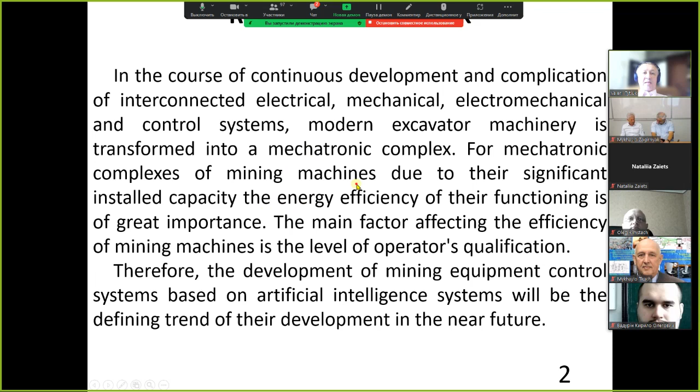For mechatronic complexes of mining machines, due to their significant installed capacity, the energy efficiency of their functioning is of great importance. The main factor affecting the efficiency of mining machines is the level of operators' qualification. Therefore, the development of mining equipment control systems based on artificial intelligence will be the defining trend of their development in the near future.

In the mining industry, the production of new generation equipment is characterized by a functional and constructive combination of electromechanical converters with energy and information components, i.e., the creation of mechatronic complexes.

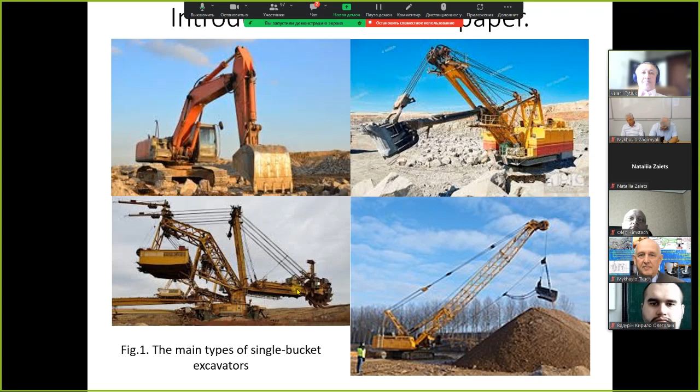Excavators are made with different interchangeable tools, as shown on this slide, and in any case the working body of the excavator has a rigid connection with the machine mechanisms, which limits the degrees of freedom.

The mining enterprises of the post-Soviet space, characterized by high hardness of extracted iron ore raw materials, use electric excavators by scheme straight shovel or rope shovel, which are the most widespread. At the enterprises of Europe and North America, hydraulic excavators on the scheme backhoe are more widespread. That determines the insignificant attention of foreign scientists to research on excavators of the straight shovel scheme.

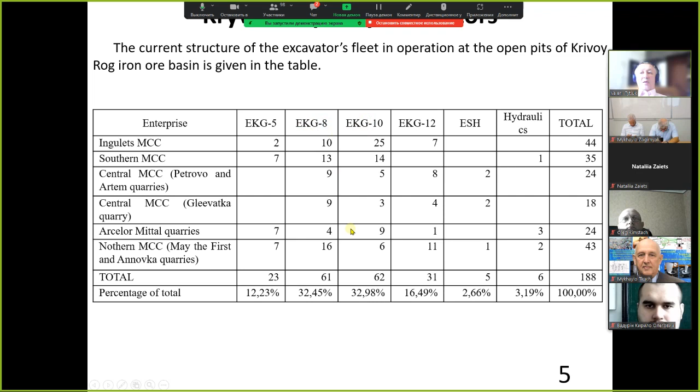This slide shows the current structure of the excavator fleet at the open pits of the Kryvyi Rih iron ore basin. About 65% of the fleet are excavators of EKG-8 and EKG-10 types. The most widespread type of electric drive used in excavators up to now remains the Ward Leonard system, also known as the generator motor system.

It should be noted that there is a systematic process of replacing obsolete Leonard electric drives with the modern electric drive system, thyristor converter with DC motors.

The most complex part of the complete excavator model is the model of the mechanical part of the excavator, which determines the nature of the bucket movement under the action of individual mechanisms. The kinematic schema of the straight shovel excavator was analyzed.

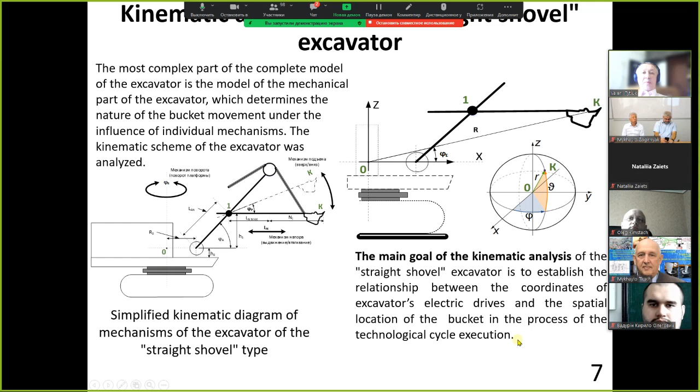The main goal of kinematic analysis of the straight shovel excavator is to establish the relationships between the coordinates of the excavator's electric drives and the spatial location of the bucket in the process of the technological cycle execution.

This slide shows the obtained expressions for solving the direct and inverse problems of excavator kinematics. These equations link the coordinates of the excavator's individual mechanisms with the spatial position of the bucket according to the kinematic schema of the excavator.

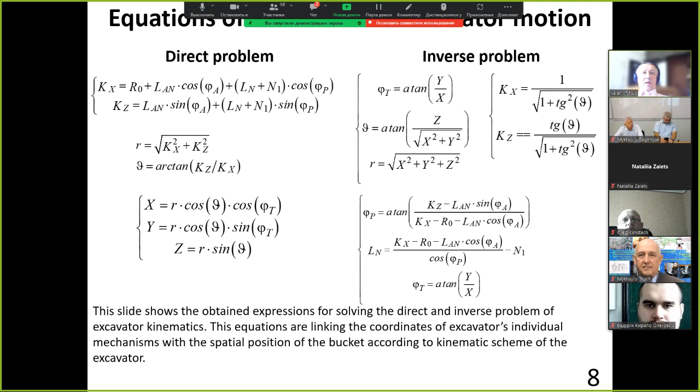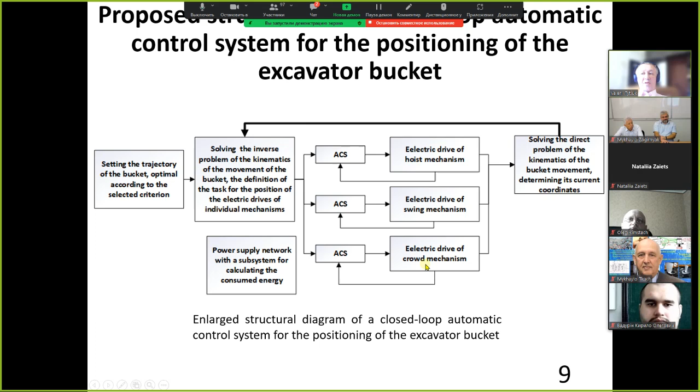This slide shows the proposed enlarged block diagram of the closed loop system of automatic control of the excavator bucket positioning, which includes the subsystem for formation of the required trajectory of the bucket movement, determination of the positions of individual mechanisms of the excavator by solving the inverse problem of the excavator kinematics, closed loop systems for controlling the position of individual mechanisms, and the subsystem for calculating energy consumption during the technological cycle.

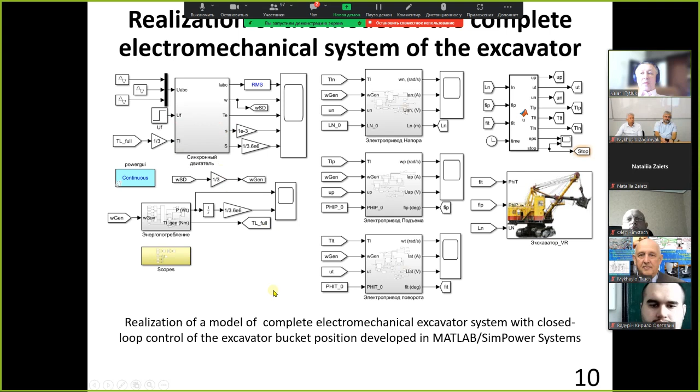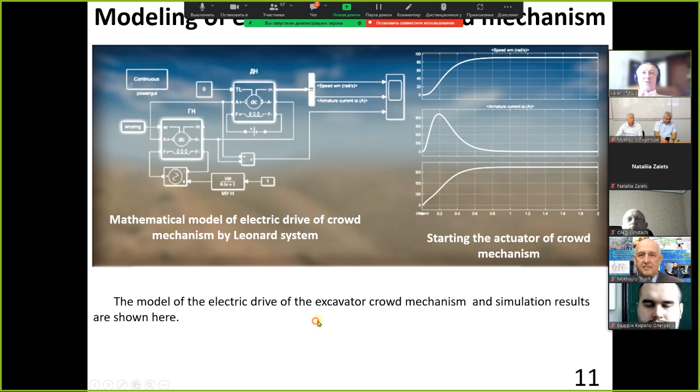The general modes of the processes and the correspondence of the numerical values of currents and speeds to the rated values confirm the adequacy of this model.

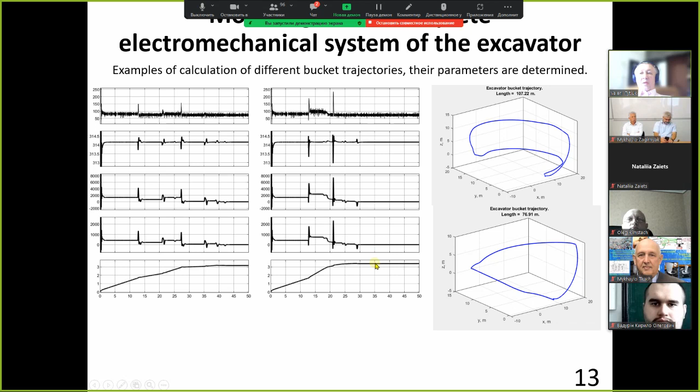Examples of calculation of different bucket trajectories and determination of parameters such as length and energy consumption are shown here on this slide.

A comparative analysis of the excavator's operation when performing different trajectories is shown in the table. As can be seen from the obtained results, the length of trajectory 2 is reduced by 27.4%. The execution time of trajectory 2 is reduced by 22.5% compared to trajectory 1.

But at the same time, the power consumption of trajectory 2 is increased by 22.8%. From the obtained results, it can be hypothesized that the control strategy for maximum speed is in conflict with the control strategy for minimum power consumption.

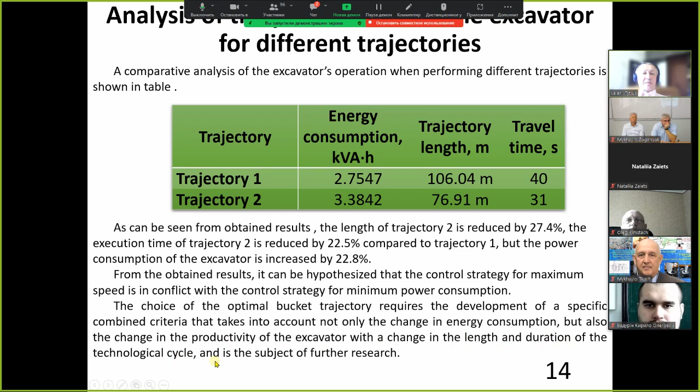The choice of the optimal bucket trajectory requires the development of a specific combined criteria that takes into account not only the changes in energy consumption, but also the changes in the productivity of the excavator with a change in the length and duration of the technological cycle, and is the subject of further research.

For qualitative visualization of the obtained solutions, a full-size 3D model of the excavator was developed in the 3D Studio Max program. The display of the excavator's 3D model was controlled with the help of Unity, a cross-platform environment for computer games development, which is used to create many applications for visualization of mathematical models.

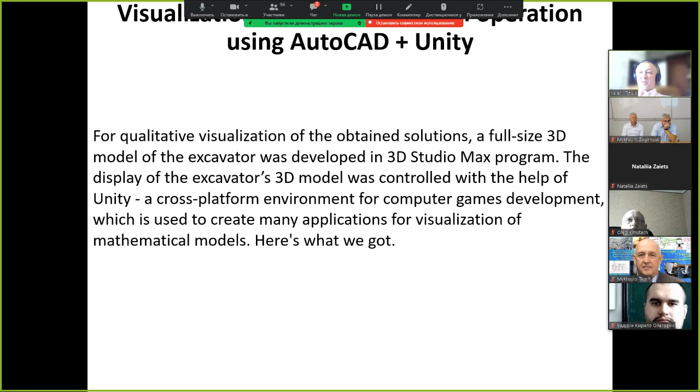Here is what we got. Sorry.

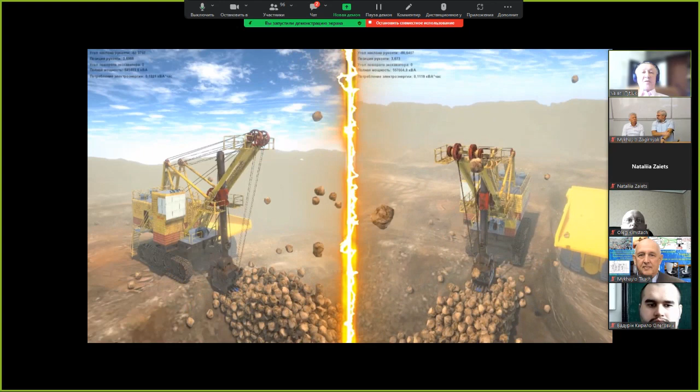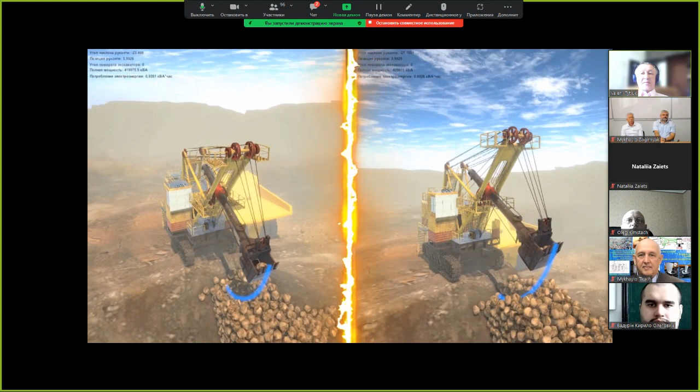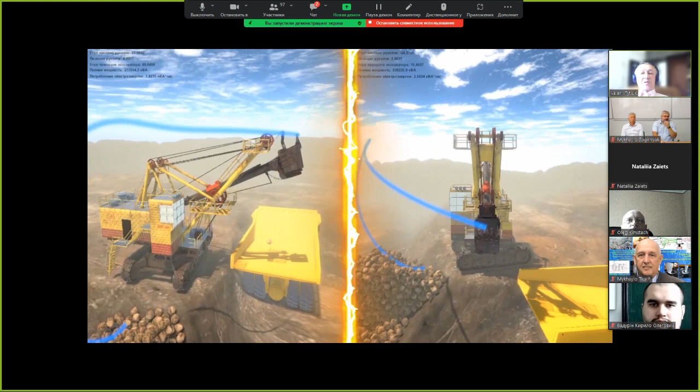First of all, the video you see on this slide is not a cartoon. It's the result of coordinated work of two models. The first model is a model of the excavator electromechanical systems in MATLAB, which calculates the position of individual mechanisms, taking into account the excavator's kinematics. The results of calculations are transferred to the Unity scene and control the position of individual elements of the excavator 3D model.

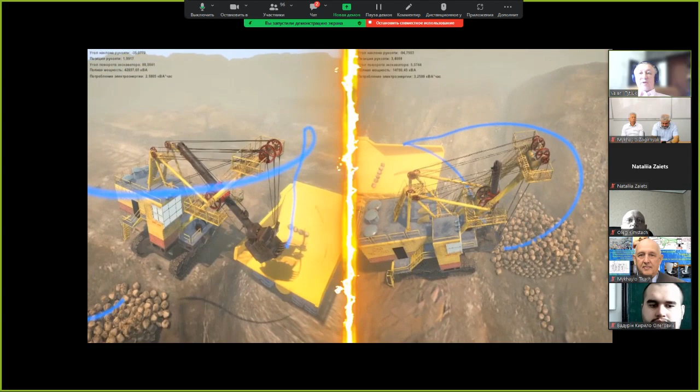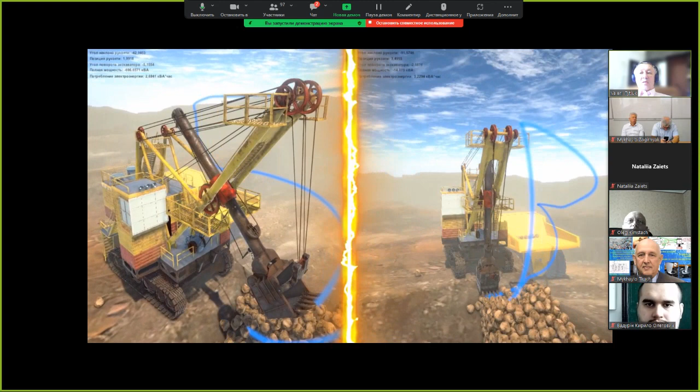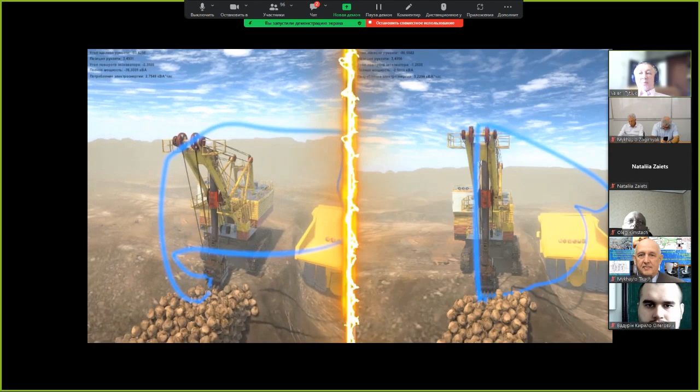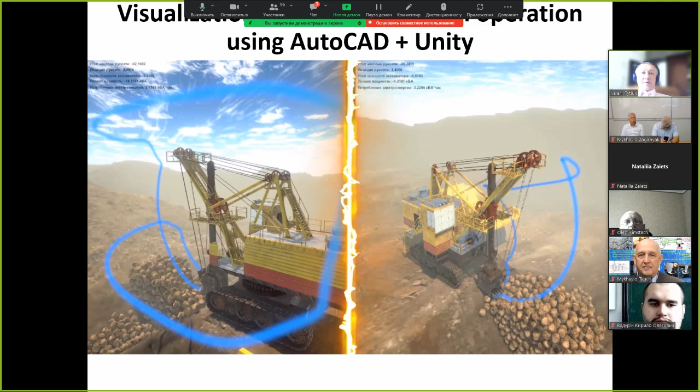As a result, we get a photorealistic scene of excavator operation close enough to reality. The technological cycle of the excavator includes digging, moving the bucket to the truck and unloading, and moving the bucket to the starting point. You can see the workout of the technological cycle on different trajectories. The panel at the top left corner shows the process cycle time, the excavator's energy consumption, and other characteristics. This allows us to compare different trajectories of the excavator bucket and optimize its performance.

The availability of a 3D photorealistic model of the excavator makes it possible to develop innovative control systems in which the information necessary for control is extracted by an artificial intelligence system with vision elements by analyzing images of the industrial environment.

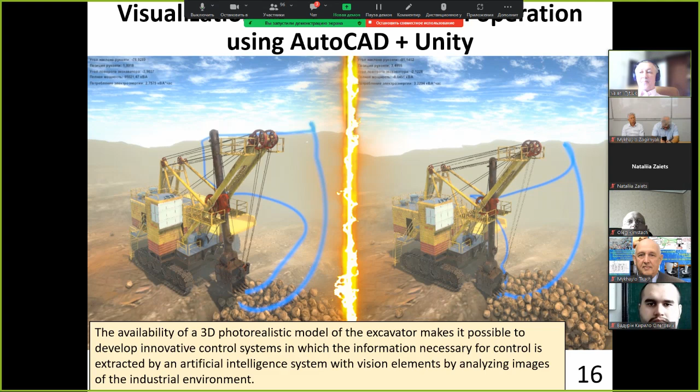High accuracy of the mathematical model of excavator electric drives, in combination with photorealistic realization of the 3D model of excavator motion, allows solving many practical and scientific problems. For practice, the most important task is to improve the training of excavator operators using 3D visualization in modern technical means. Further development of autonomous virtual reality devices will bring a revolution in this area of training.

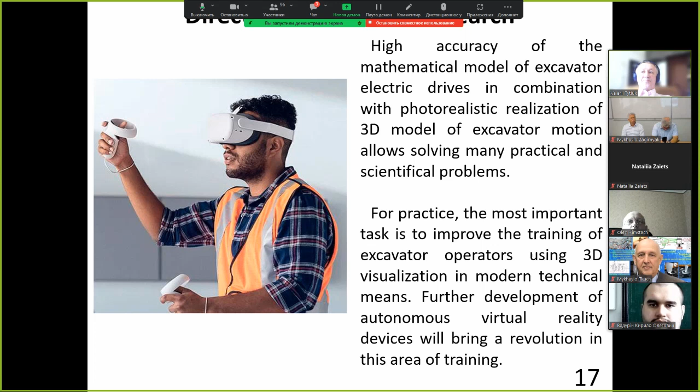Let us represent the excavator operator as an element of the excavator control system. Then we can synthesize an adaptive excavator control system that compensates for the operator's inertia and non-linearity.

It's necessary to develop criteria for the quality of the trajectory of the technological operation execution using the theory of efficiency of technical systems. It's possible to develop an excavator control system using artificial intelligence equipped with vision systems. Thank you for your attention.

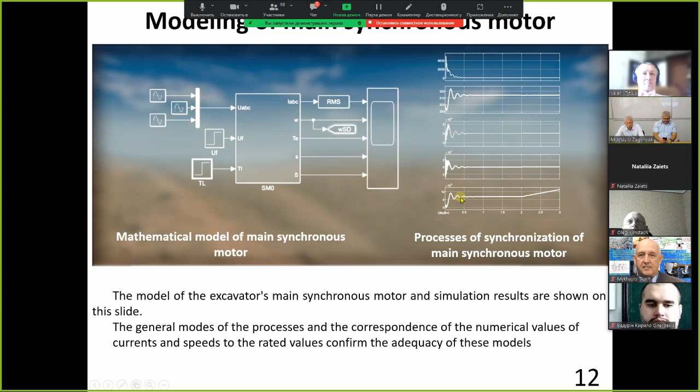Yes. So as far as I can understand, in this paper you investigate only one of the three previously shown schemes of working of excavator, as I could understand, because at the start of your work you showed us this one. So in this work you study only one of these schemes. Do you have in progress plans to use another one? Is it so?

Thank you for your question. Our goal was to develop the model as a rope shovel excavator because there are many investigations and many papers about backhoe excavators by foreign scientists, but there are not enough papers and research for this type of excavator, because this type of excavator is widely used in our country and on post-Soviet Union space.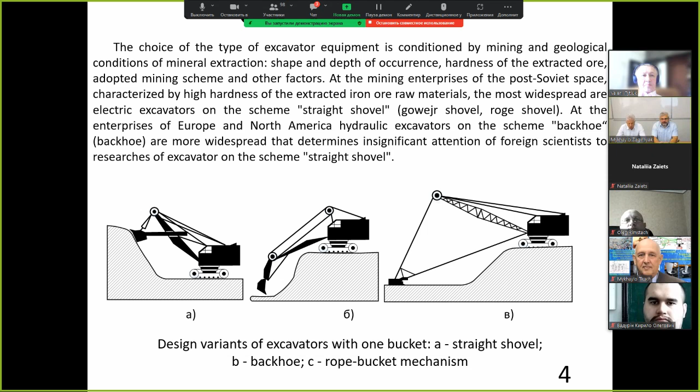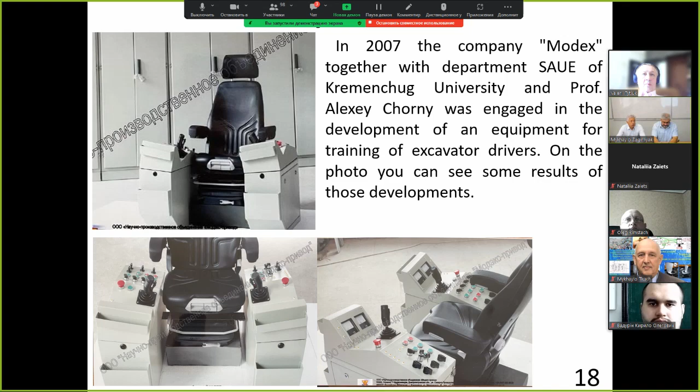Okay, thank you. Thank you so much. So yeah, as I can understand, the final goal of the paper is how to increase the level of training of the operator of the excavator as a main goal. Yes or no? I understand it like this.

Yeah, when we use the developed model, we can increase the level of excavator operator training. I saw this model when it worked in Oculus Quest 2 virtual reality glasses. It's absolutely new emotions, an absolutely new level of interactivity.

But the main goal of our report is not the training of excavator operators. The main goal is to increase efficiency of using mining equipment with a cyclic operation type.